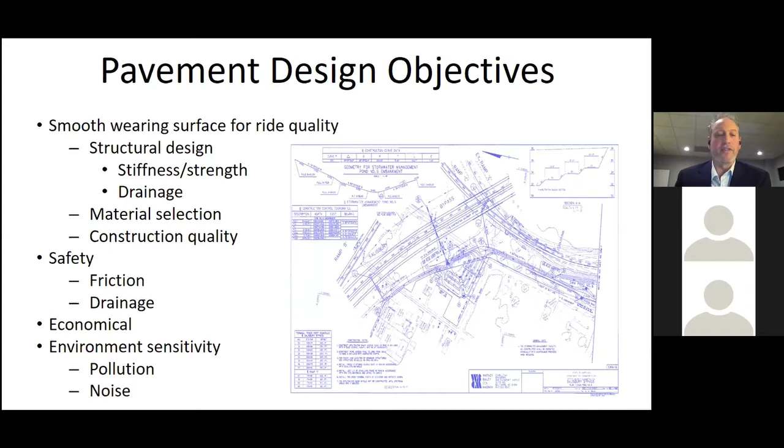So this presentation is going to focus on the structural design. It's not going to consider safety and economics and other factors, but will focus mainly on structures, because we're using geosynthetics to make these roadways stronger, and that's the aspect I want to talk about today.

When it comes to structural design, the basic idea is you have a load applied to the surface, and that load is greatest at that surface - the pressure is greatest. As the pressure distribution goes through the structure, it gets less and less in layers, as you see in this illustration, where on the bottom - which might be your subgrade layer - you want to limit those stresses because those tend to be the weakest. The upper layers, like the asphalt or base course layer, provide the structural support for the loading by limiting the straining and stressing of those lower, weaker layers.

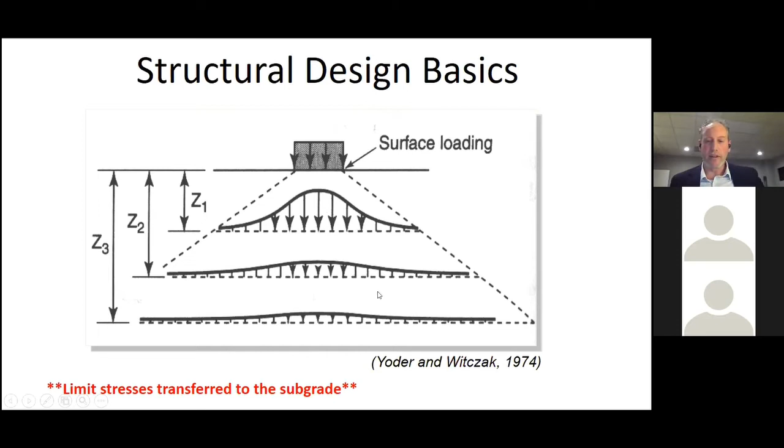In geosynthetics, when you apply a geosynthetic, it's typically put in at the bottom of the base course layer. In this case, you're seeing an unpaved roadway illustration with the geosynthetic at that bottom layer. You can put the geosynthetic higher up, closer to the load, and that does improve performance somewhat. But this illustration is meant to show that there are two main ways geosynthetics might be used in roads.

One case is where you have a really soft subgrade, and another where you have a firm subgrade. With a soft subgrade, you can expect deeper ruts from the load - the material itself is put into higher tension beneath the load, being supported just directly beneath through this high tension and greater rutting, as shown in this illustration. Whereas with a firmer subgrade, typically the roadway is not going to tolerate the rutting - it's maybe a more traveled path that can't tolerate it.

In this case, the geosynthetic is now part of the design, and you'll see the stresses are limited, but they're being borne partly by the geosynthetic at the bottom of the layer.

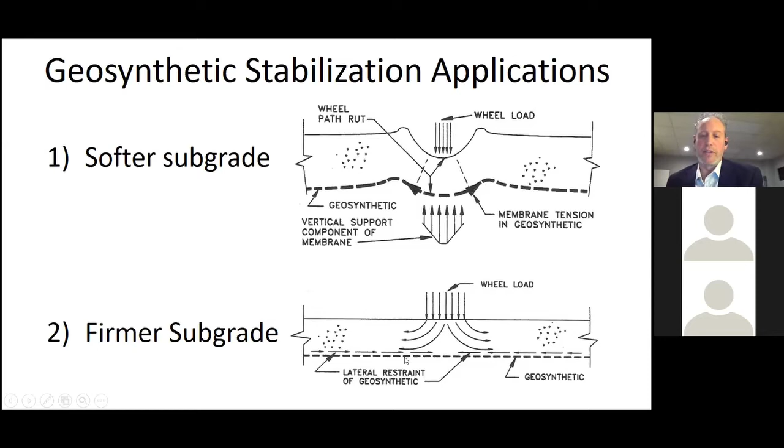Taking the first case, where the subgrade is on very soft ground - this may have low shear strength, or be highly sensitive to water - typically you're looking at CBR, California Bearing Ratios, between 1 and 3. I'm not sure if this property is used in Australia for design, but if it is, CBR is oftentimes used here for characterizing subgrade strength. You can have a high water table, which creates some of this mess you see in this photograph, or a high plasticity index. However you slice it, this is a bad situation you don't want to run into.

In this case, you can use the geosynthetic to create a platform where you're not just pushing all of the gravel layer down into this muddy mess below it.

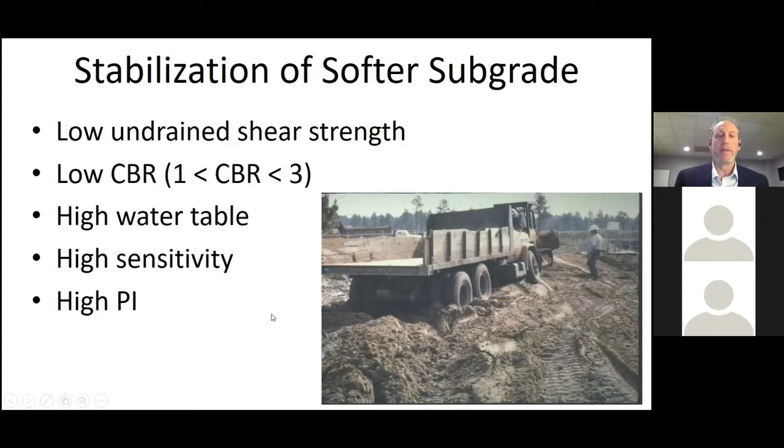Where you have a firmer subgrade, you're incorporating the geosynthetic not only as a means of passing over the structure during construction or throughout the life, but now for a longer period of time, so it becomes part of the design. It needs to be a little more sophisticated, trying to be more efficient. You can do it one of two ways: use the geosynthetic to reduce the section thickness, relying on its strength to provide some structural support, or use it to increase the lifespan of the roadway.

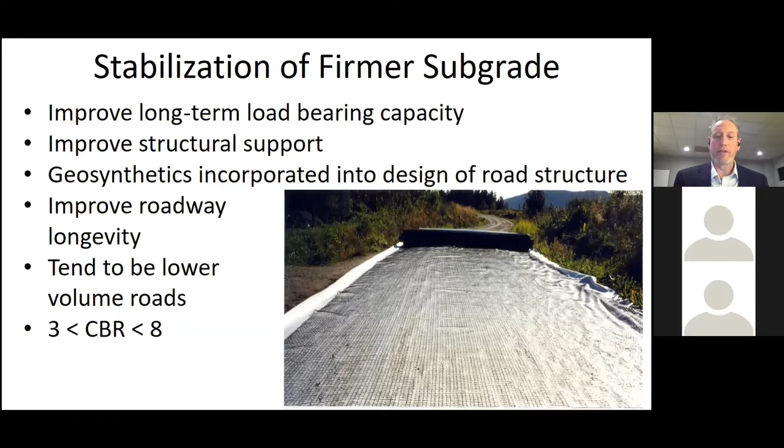This tends to apply on roadways where the subgrade CBR is maybe between 3 and 8. Anything above 8, there's minimal benefit from the geosynthetic, other than maybe using a textile for separating the layers from one another. But in terms of structural support, anything above an 8 is really not that beneficial.

So now let's talk a little more in detail about these mechanisms that we see throughout the pavement. Again, we have a road surface with a tire on top. As the tire puts pressure down, the stresses are transmitted down through the base course layer, and eventually they intersect this geosynthetic layer, which in this illustration is at the bottom of the base course.

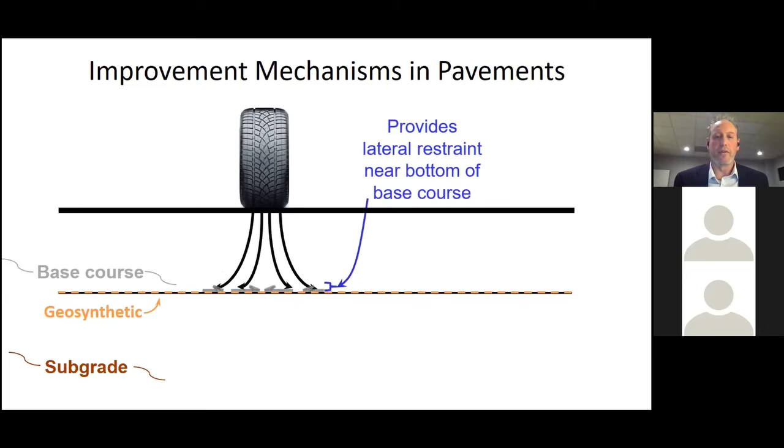As it approaches that layer, you can see the stresses begin to bend and turn to the side. This is partly because the geosynthetic is providing lateral restraint to the gravel at the bottom of that layer, not allowing the gravel to spread out of the way. If the gravel is able to spread, the tire will create a rut in the surface, so you're trying to limit the rutting of the roadway.

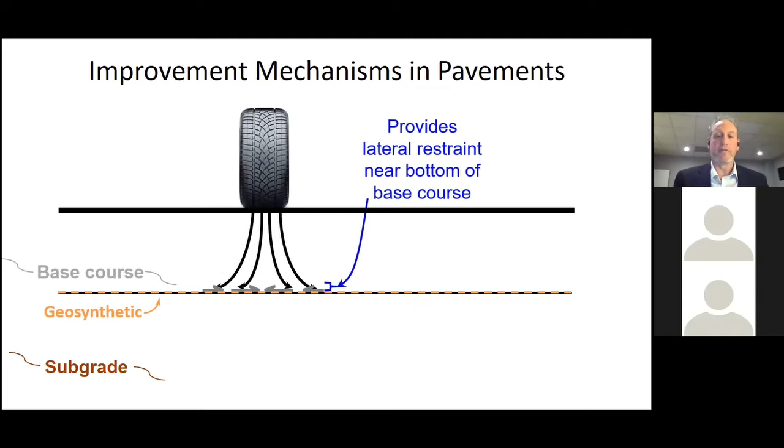This also has the effect of widening the distribution angle. As the distribution angle goes down through the structure, it begins to widen as it comes toward the bottom where this lateral restraint is happening. This increases the horizontal stresses in this area but reduces the vertical stresses, and you see a jump in stiffness due to the geosynthetic. Beneath that, in the subgrade area, you see a reduction in vertical stresses and also in shear. So you won't have as much deformation in the subgrade layer due to the geogrid or geotextile reinforcement being present in the structure.

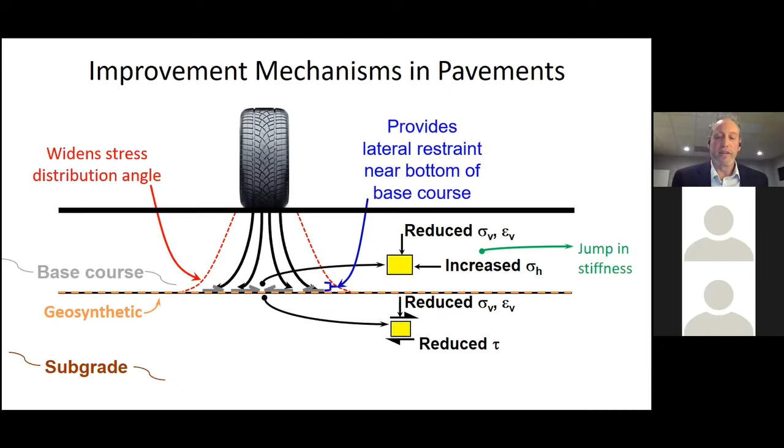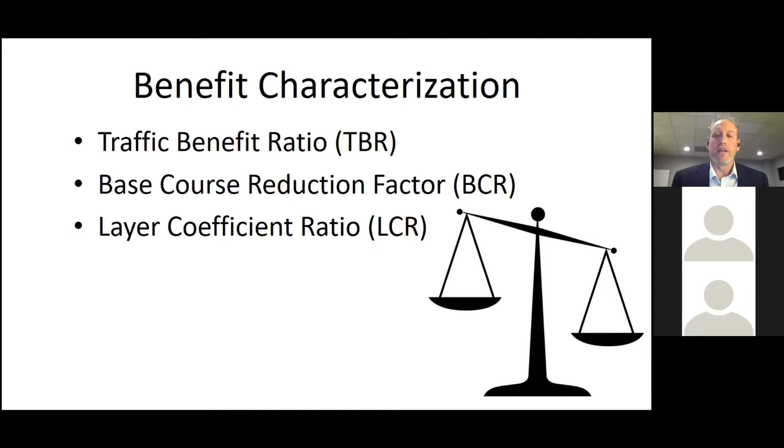Now, there are many ways to measure the benefit of geosynthetics in roadways. There are 3 primary ways they're calculated, and I'll talk about each one. The first is traffic benefit ratio, also known as TBR. The second is base course reduction factor, also known as BCR. And then there's also a layer coefficient ratio called LCR. Each of these is commonly used in design, probably mostly TBR and LCR. BCR and LCR are related to one another, and I'll show that in a couple of slides.

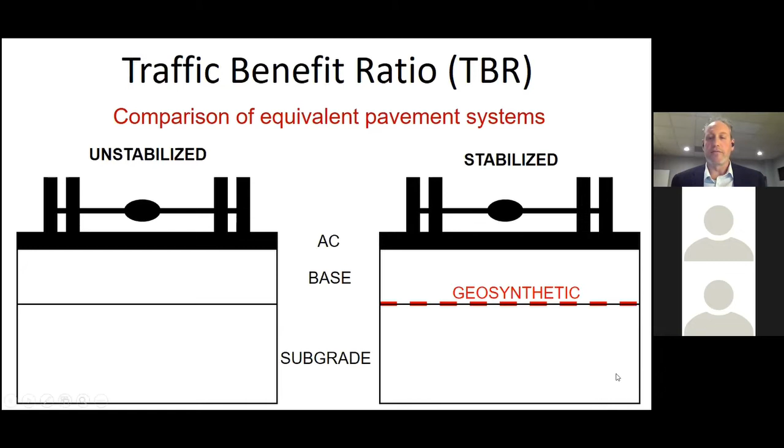In terms of traffic benefit ratio, TBR, you're basically comparing two systems that are identical to one another: the asphalt thickness is the same, the base course thickness is the same, and the subgrade is the same strength. The only difference is that one is stabilized with geosynthetic and the other is not. So you run these simulations, perhaps in the lab or on a full-scale test, and I'll go into methods of doing that. You see that the geosynthetic hopefully performs better than the unstabilized, and you make a comparison between the results.

So here are some basic results you might get, where the unstabilized simulation reaches 25 millimeters of rut in a short amount of time, whereas the stabilized test section reached a much larger number of traffic passes compared to the unstabilized test section. To calculate TBR, it's simply the ratio at a particular rut depth.

Let's say the rut depth you're interested in is 12.5 millimeters. At this rut depth, you take the ratio of the number of traffic passes you got with the stabilized section, dividing that by the unstabilized. In this case, you get a TBR of 4, meaning the roadway with geosynthetic was able to last 4 times as long in terms of traffic benefit.

If you do this same analysis later, say you're able to tolerate more rut, 25 millimeters, in this case the TBR is actually greater. Based on this calculation, you can use this in design to anticipate how many traffic passes you might get from a stabilized versus an unstabilized road structure using geosynthetics.

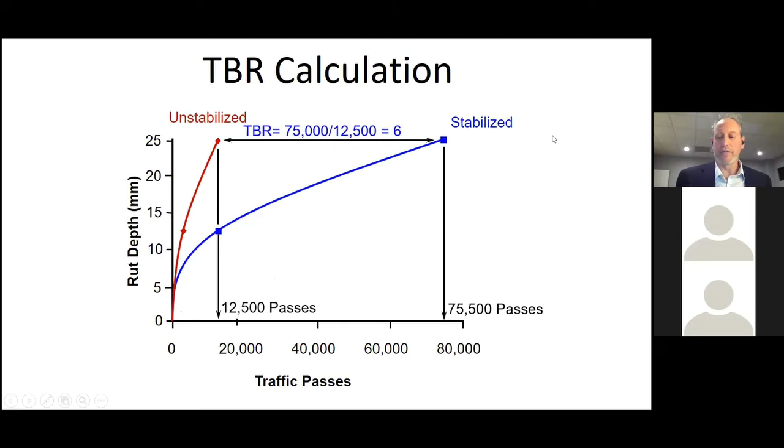Base course reduction factor, or BCR, is a calculation made when comparing pavement systems that lasted the same lifetime. They were able to accommodate the identical amount of traffic passes, but in this case, the geosynthetic reinforced test section was a bit thinner. The base course was just a little thinner than the one that was unreinforced.

This is a little hard to anticipate, and that's why most of the time the calculations are done using TBR, because it's hard to know exactly what this depth of base course is going to be without knowing how much benefit you're going to get from the geosynthetic.

So there is an iterative process that you can use to determine this ratio. But if your design is to save a certain amount of thickness on your road cross section, this might be the way to use it, saying that you're going to reduce your base course by a certain percentage. This is just another way of calculating the performance.

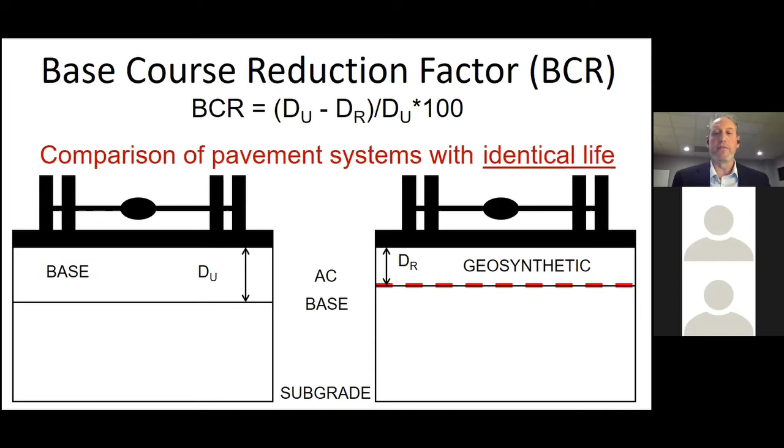And then finally, layer coefficient ratio is to determine the benefit, or try to quantify the benefit of the geosynthetic in terms of a modified thickness of the base course. So again, you're looking at it in terms of the base course thickness. LCR is equal to 1 divided by 1 minus the BCR in percent, divided by 100. So they're related to one another.

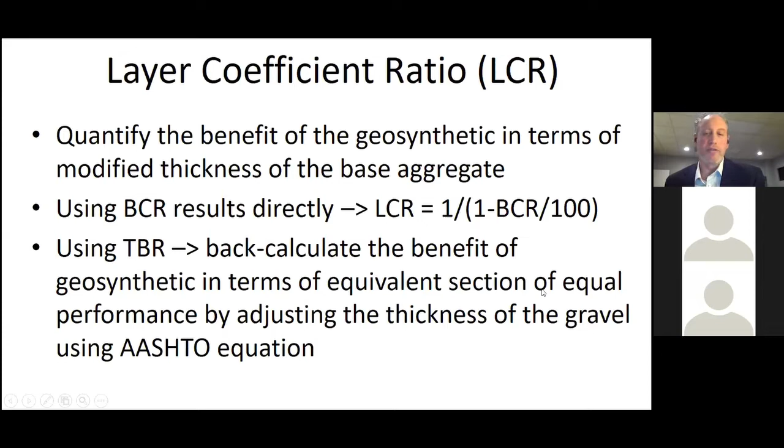The way to get this LCR can be done theoretically by using the AASHTO equation. This is the American Association of State Highway and Transportation Officials equation that is commonly used as a simple way of designing roadways in the United States. I'm not sure what equations are used elsewhere - if you're in a mechanistic design, maybe someone can comment and let me know what that is. But there's a way to calculate that, and I'm going to talk a little bit about that now.

Here's the AASHTO equation. I'm not going to go through all the parameters here, but the one I want you to focus on is the structural number, which describes how strong the support is from the structural benefit of the layers. The way that's done is by having this equation, the structural number, where you have a coefficient that describes the structural strength of the particular layer.

In this case, A1 and D1 are for the asphalt, and D is the thickness, so you'd multiply those two together. Then base course has the A, again a structural coefficient associated with the base course, multiplied times the thickness, and then also multiplied times the drainage coefficient. So this is how we calculate the structural number.

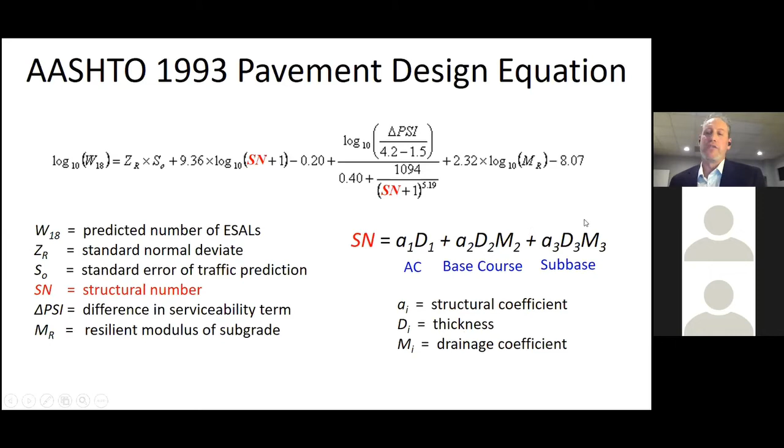Essentially what you're doing when you determine LCR is the LCR is a multiplier times the base course term in the structural number equation.

So let's just say, based on your performance testing, the test section worked much better - let's just say it worked 20% better. You basically apply that 20% benefit to the base course term in this equation. So it would be a benefit of 1.2 multiplied times that term, which makes the base course seem like it's a little thicker, or makes this A2 term seem like it's a little stronger. However you want to think about the LCR, it's basically to modify the second term in the structural number equation. So LCR obviously should be greater than 1 to be able to apply that increase in the structural number to the design equation.

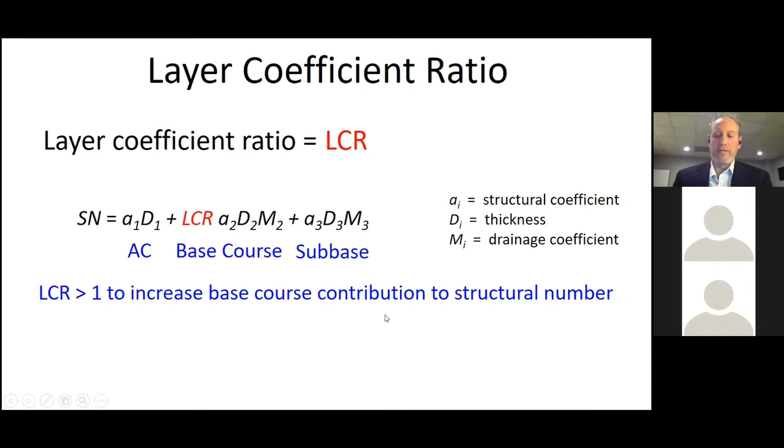So that's the basics about the way that performance is calculated. But here's how I wanted to talk a little bit about how you get that performance information in the first place through different testing. This is something that we do here at TRI, and it's something that I've done for quite some time now. So I wanted to share with you some ideas about performance testing, because many times performance testing can be done poorly, and there are good ways to do it.

Probably the biggest key to doing performance testing, either in the field or in a lab, is to make sure there is consistency between the test sections. You're trying to compare the do-nothing case to the one where the geosynthetic is in the test. If everything is the same except for just the geosynthetic, then you have a good way to compare those one to another. Without that, it's very difficult, and all the competing factors associated with roadways begin to outweigh some of the other elements that make it easy to calculate performance. So that is probably the key element to making performance testing work well.

Of course, you've got to select good materials, and you've got to place those materials. If you're doing it in a lab situation, you want to make sure it's as realistic as possible, hitting all the proper tolerances and doing the QA, QC to ensure that the test sections are built similarly to one another.

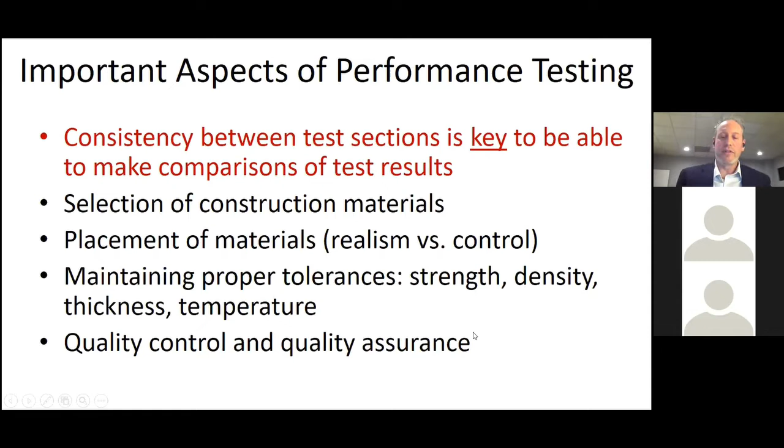There are different methods of doing performance testing, all the way from full-scale tests out on an actual roadway, to doing something maybe larger scale but in a laboratory with accelerated pavement testing, or some sort of smaller simulation in a lab using a smaller box or something that applies a load.

To know which test method you might want to use, you're basically going to balance realism with cost and time and effort. The more realistic it is, probably the greater effort it is, and it's going to cost you more. So there are some trade-offs, but the smaller simulations can tell you a lot, and they're maybe more rapid and just as well. So it depends on your budget and what you're after.

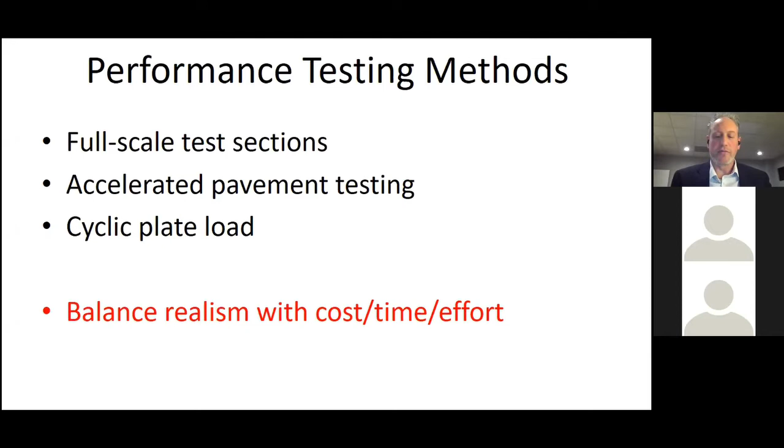A full-scale test section could be on an actual road, like I said before, or it can be a controlled experiment. It's the most realistic because it's done with full-scale equipment. It's oftentimes has the longest timeline because you're relying on actual construction and all that goes into that.

But you tend to lose a little control, especially if it's on an actual roadway, because the contractor wants to do this as quickly as possible, and you might be a thorn in their side as you try to do this experiment in the midst of their trying to make money.

These tend to be higher cost, but again, if you do this just on an actual roadway, and you don't really care about all the details of making sure the test sections are similar to one another, then you can strip some cost off. But then when you go to make your comparisons, you're going to suffer there. So there's always this balancing act that you have to do to try to figure out the right way to do it.

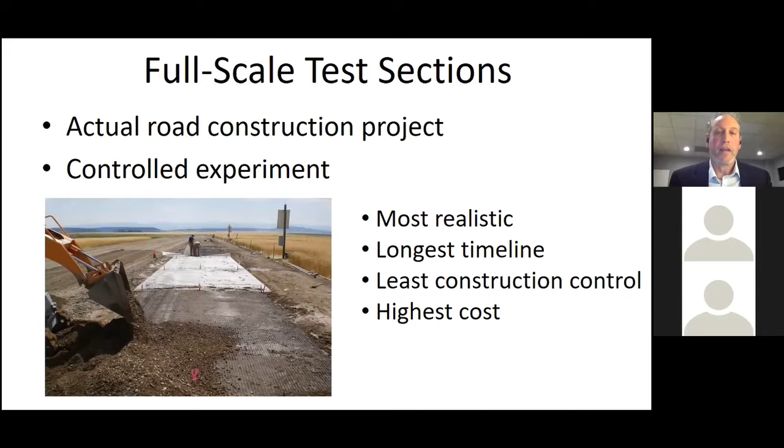I'm going to give you an example of a full-scale research project that I led when I was part of Montana State University back in the mid 2000s. 2014 is when we completed the project.

In this research project we had 17 test sections. I'll show you what that looked like here in a minute. We wanted to look at the geosynthetic material properties themselves to see which one actually was related directly to performance in the field in this particular application.

This was a subgrade stabilization application, so it was a very soft subgrade, a CBR of approximately 1.7. And we wanted to understand those mechanisms by which the performance was enhanced.

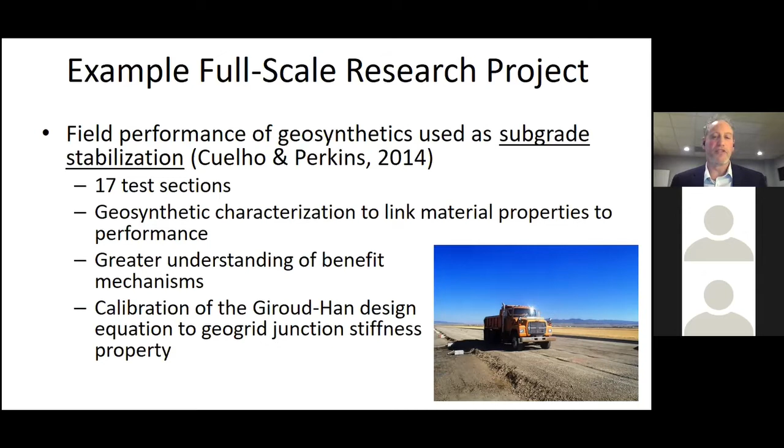Then we calibrated the Giroud-Han design equation for a particular material property, which is the junction stiffness. I'll show you how that was done as well. In this experiment, we had 17 test sections, as I mentioned.

There were 3 test sections at the beginning where we had an integrally formed grid. It was the same grid in 3 of those test sections. Each test section was 15 meters long and about 5 meters wide. In these test sections, we had the same base thickness of approximately 27 or 28 centimeters all the way through.

But these first 3 test sections actually had a stronger subgrade on one end and a very weak subgrade here. Then from section 3 all the way to the very end had a subgrade strength of about 1.8%. So what we're trying to do here is vary the subgrade strength to see what effect that has on the performance.

On the other side, where we had the controls with no geosynthetic, we actually increased the thickness of the base for control 2 and then even thicker for control 3, with thicknesses of 41.4 and 63.2 centimeters. The nominal thickness was, again, approximately 28 centimeters.

In this way, we set the experiment up so that we could back calculate what the effect of gravel thickness was, as well as the subgrade strength. And in the midst, of course, we have all these different materials that we were able to test to see which material worked well and why it worked well.

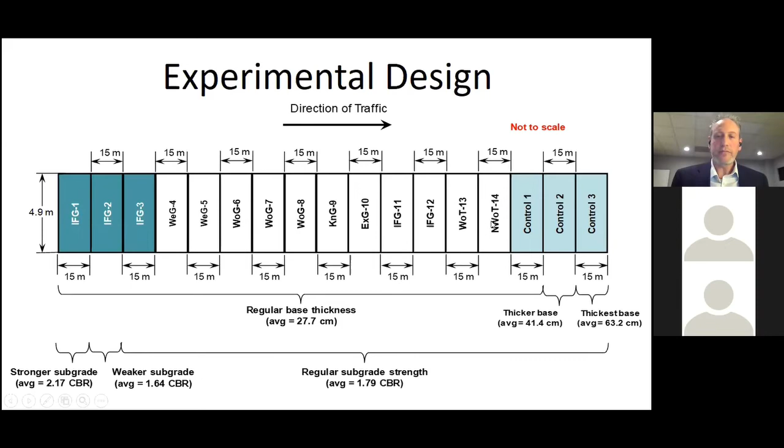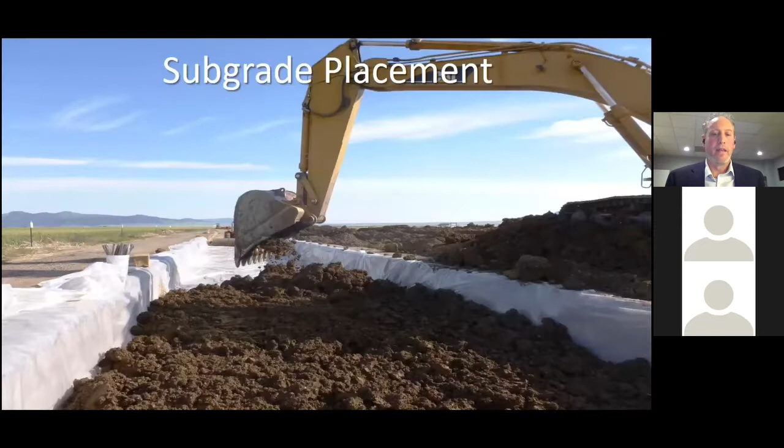This is mixing the subgrade and putting it in the trench. We had to mix it at the right proper moisture content to make sure that it was exactly the right strength the entire way. It's very wet—like I said, a subgrade CBR of approximately 1.8%.

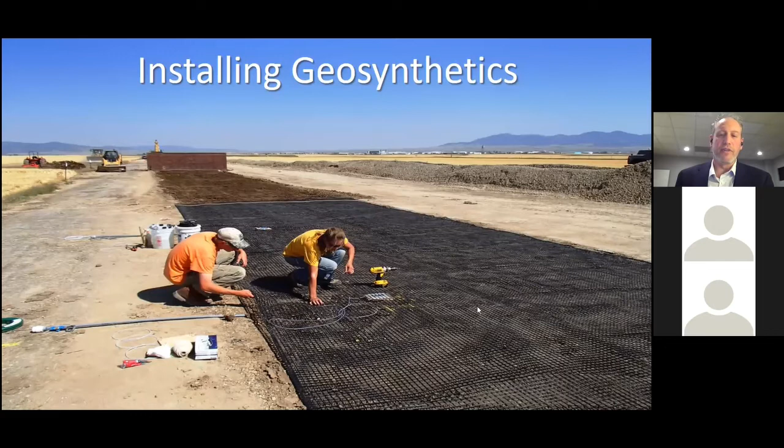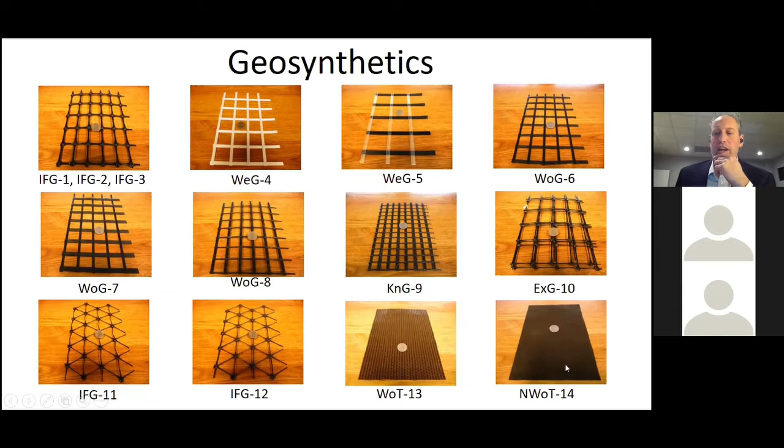Here is a picture that shows each one of the geosynthetics that we used, starting with an integrally formed grid. These are very common materials. Then there's a welded grid, and another welded grid. You can see the different types here, and you may be more familiar with the brand names. We also used 3 different woven grids, shown here. And then one knitted grid, a different style of grid. Another had a triple layer extruded grid. And then 2 other integrally formed grids with triangular shaped apertures. Finally, we used a woven textile and a non-woven textile for each of the test sections. So these are the different materials that we used.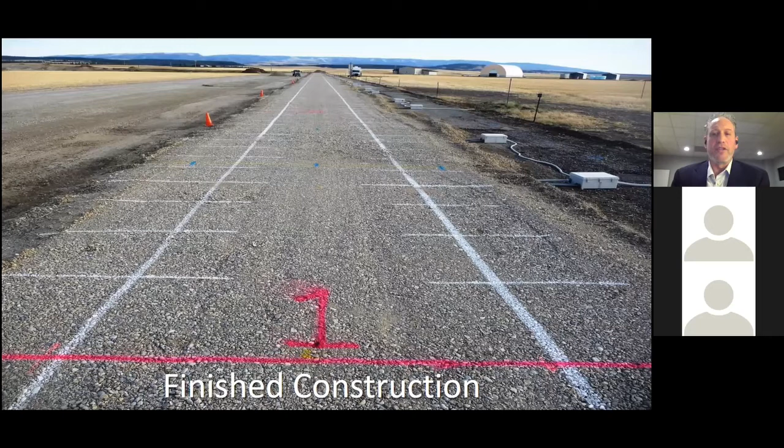Finally, we went to put the materials in. We covered it with base course and drew some lines on there so that the truck driver could stay in the right spot with all the instrumentation. Then we drove a truck over it — a fully loaded 3-axle dump truck, driven across at approximately 10 kilometers per hour.

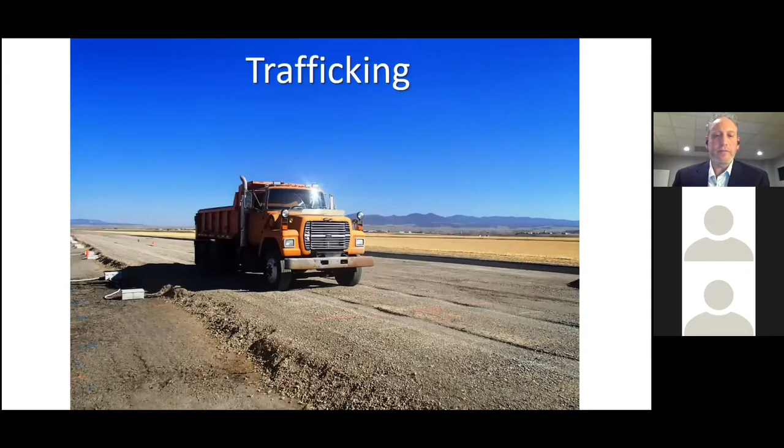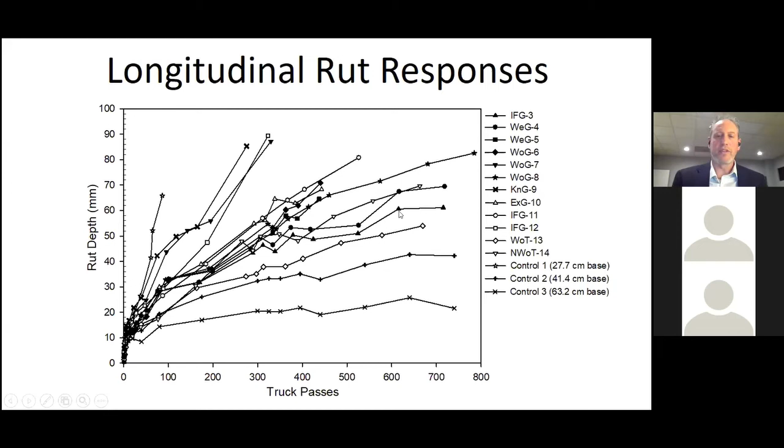So we took that information and calculated the TBR — traffic benefit ratio — at a particular depth of rut, in this case 63.5 millimeters. We did the analysis and also calculated the amount of base course reduction. What I want to show first is that all these values of TBR are positive, meaning every single material was able to improve the performance of the test section compared to the control. Even the worst performer, the knitted grid, had a base course reduction factor of almost 10%.

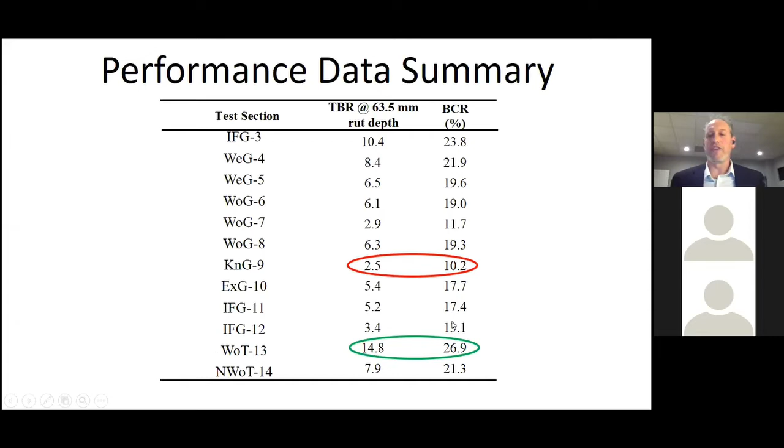So you can reduce the thickness of the base by 10% in this case. The best performer was the woven geotextile, with a traffic benefit ratio of almost 15 — meaning it could accommodate 15 times more truck traffic than the control. The base course reduction was around 27%. So you can see the range of the different products and how they performed in the field.

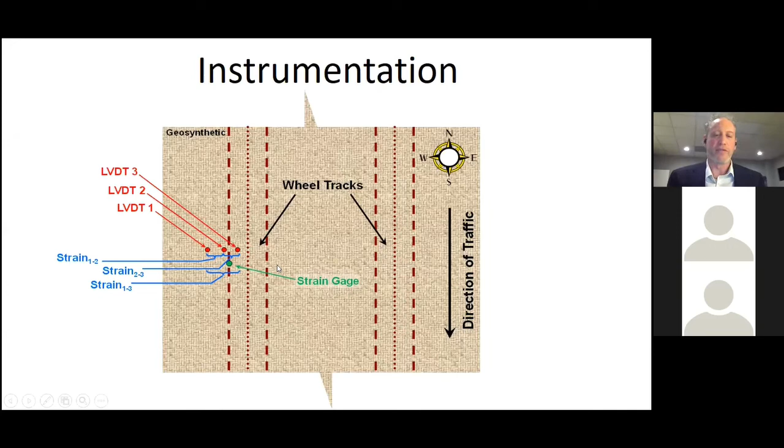We also put in some instrumentation because we wanted to measure what was going on — this is the behavior side of it. We had strain gauges and LVDTs set in the ground to look at movements. This is an illustration. The basic thing I want you to get, without getting too stuck in the weeds, is that there's a transition from lateral confinement, where the geosynthetic provides resistance to the movement of the gravel in the lateral or horizontal direction.

But eventually, once the rut gets too deep, you transition into a tension membrane, where the material is under a lot of stress and tension. There are different material properties associated with those two ends — in the first part you rely on something different than when you're relying on pure tension at higher deformations.

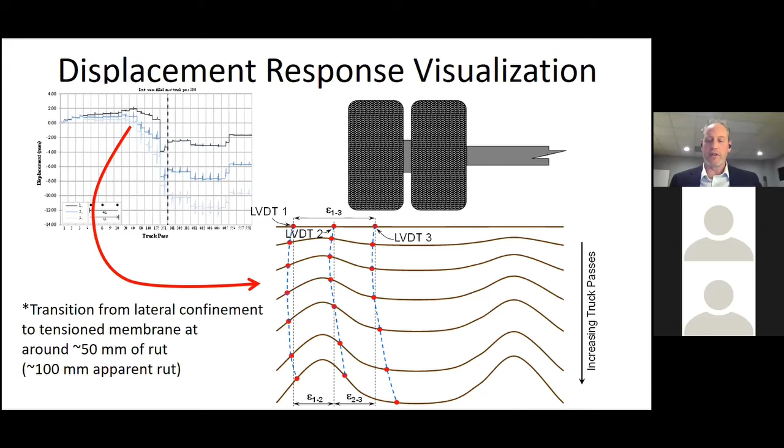I just want to show an illustration of how this might look as the truck goes through the test sections. You see these two little red arrows down here — as the truck continues to go past, the red arrows and the stresses in the material begin to accumulate. Once the rut forms, there's always going to be that stress on the geosynthetic.

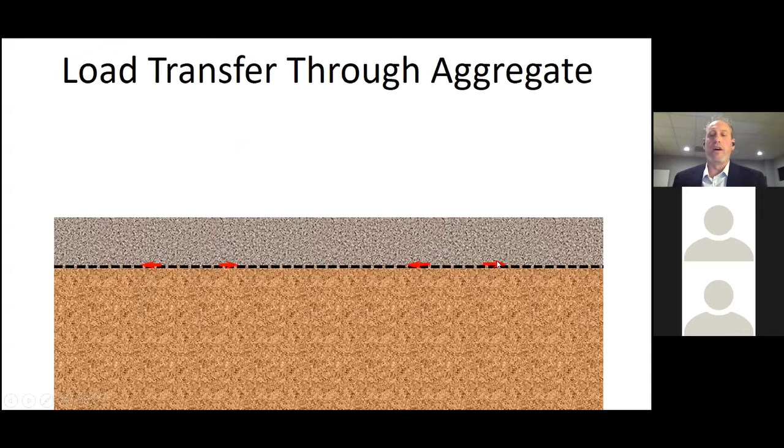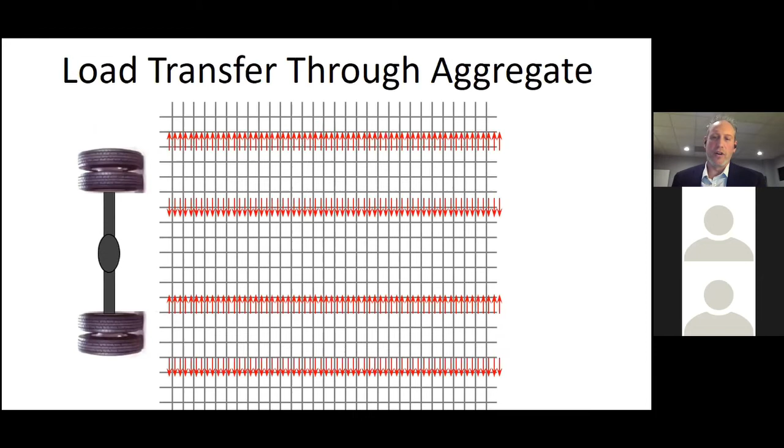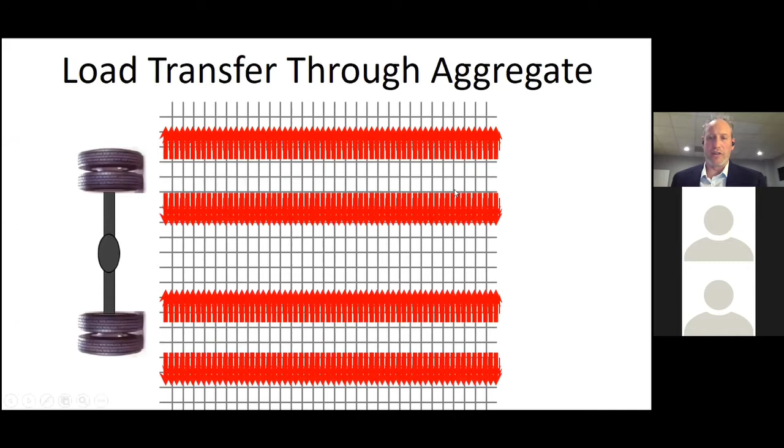So you can see that the stresses get highest after many truck passes. I'll show this in the plan view as well, because I think it helps illustrate this. As you go across, you're pushing outward from the different tires on either side, forcing the gravel in that direction, so the stresses are increasing in time as traffic increases across the test section, until eventually you have high stresses outside each of the wheel paths in this direction.

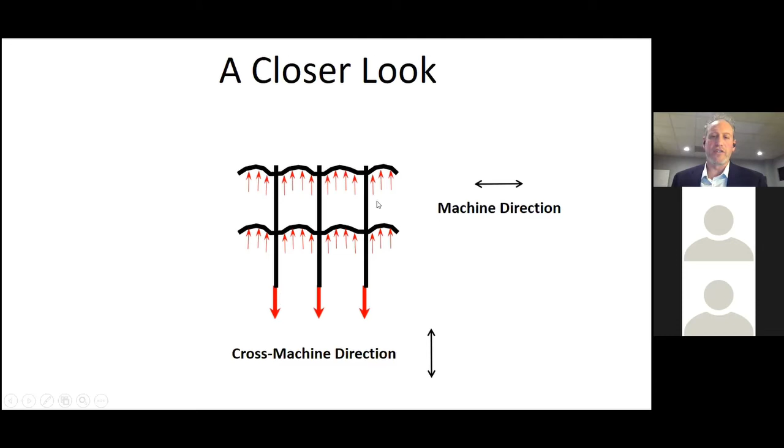If we take a piece of geogrid, in this case a biaxial geogrid, we can see that those stresses are being borne by the cross members in that direction, and then the tension is being borne by the straps transverse to the driving direction. So the truck is going across side to side on this slide, and the stresses are being applied in the opposite direction.

There's actually a test at ASTM that looks at that particular property. But we had lots of different properties of the material we looked at. Here we looked at wide width tensile strengths, cyclic tensile strengths, a pull-out test where you look at the resilient interaction between the geosynthetic and the gravel, and also a test called junction strength. We also looked at aperture stability modulus, which is in the Giroud-Han equation.

What I'm showing here on this slide is the R squared, which is how well a linear regression fit between the materials used—these properties were different between the different materials—and how well that fit the performance data.

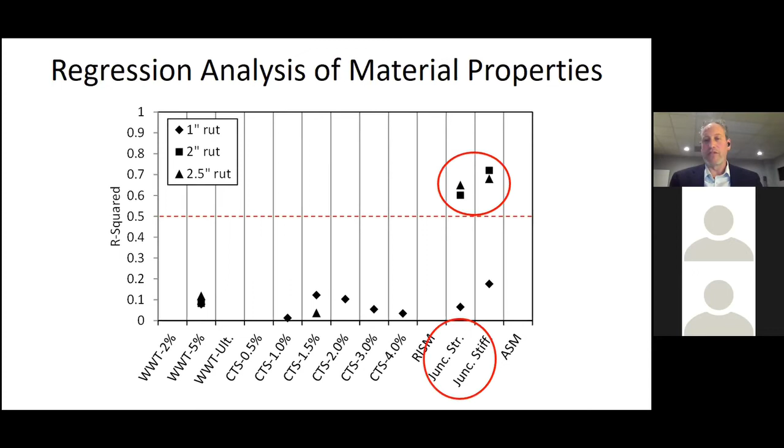What we see here is that the R squared is highest on the junction strength or junction stiffness—how well those junctions and that material are set with one another, how strong that is. And that makes some sense based on what I showed you earlier and how the stresses are borne in the material. So this is that test.

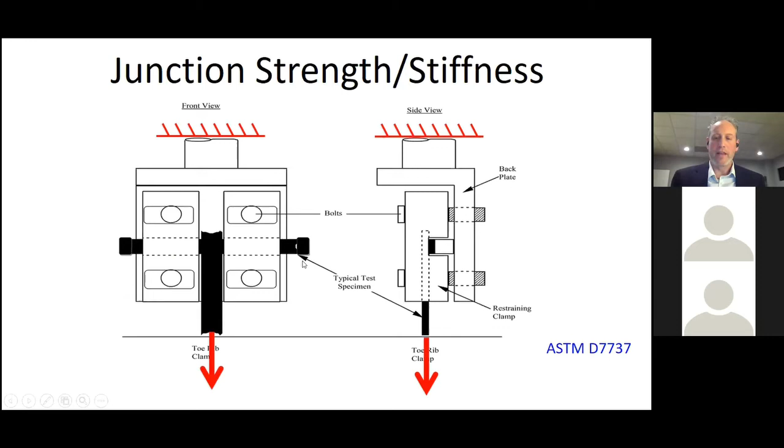It's an ASTM test. Basically you pull down on this cruciform-shaped material, and that junction is stressed by trying to shear one versus the other. We found that property really matched well with performance. In this case, the stiffness is just the initial part of the curve—that's how we calculated the stiffness of that junction.

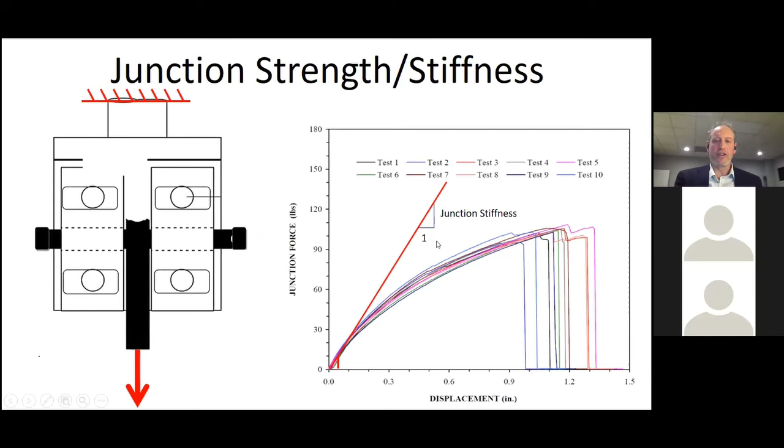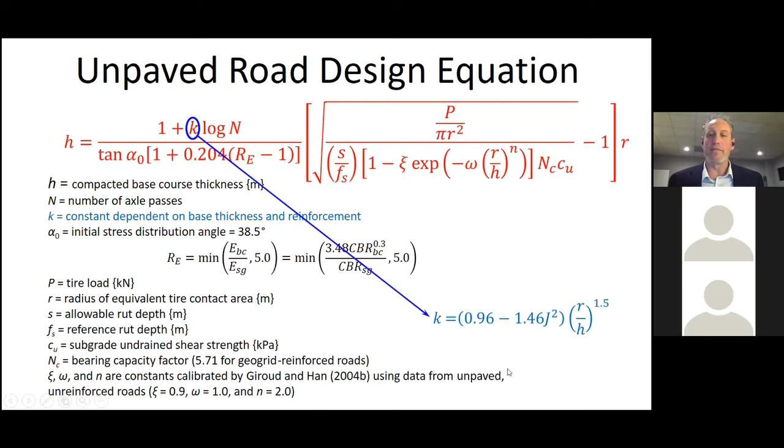We wanted to say, okay, now the Giroud-Han equation, which is this hairy, big equation—if you haven't seen it, I don't mean to intimidate you, I'm not going to go through it in detail. But what I wanted to point out is that this K factor really describes the geosynthetic component in this design. The J here is the aperture stability modulus, a test that twists the junctions of the geogrid. We didn't find that was related to performance.

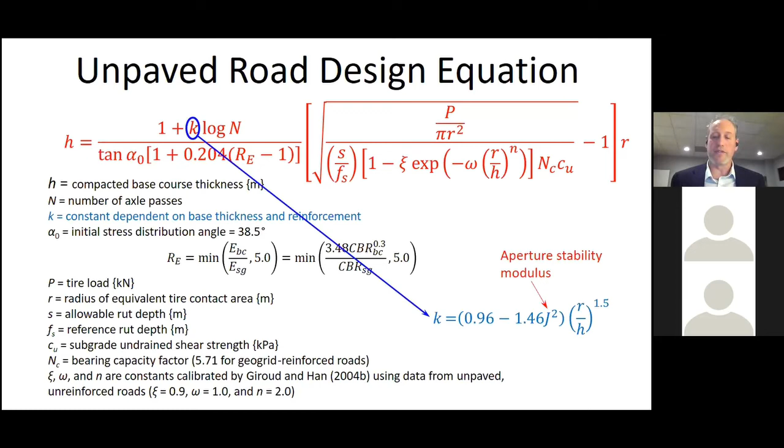In our case, we found this junction stiffness was related to performance. So we basically modeled that, and through a series of mathematical work, we essentially modified this K term in the Giroud-Han equation to accept this property rather than using the original aperture stability modulus. This just shows an illustration of how you might do that.

You calculate this junction stiffness, you come up here to the amount of rut that you might be allowed, and you get this K-prime factor from this chart, and then you can use that in the equation to solve for the thickness of the gravel.

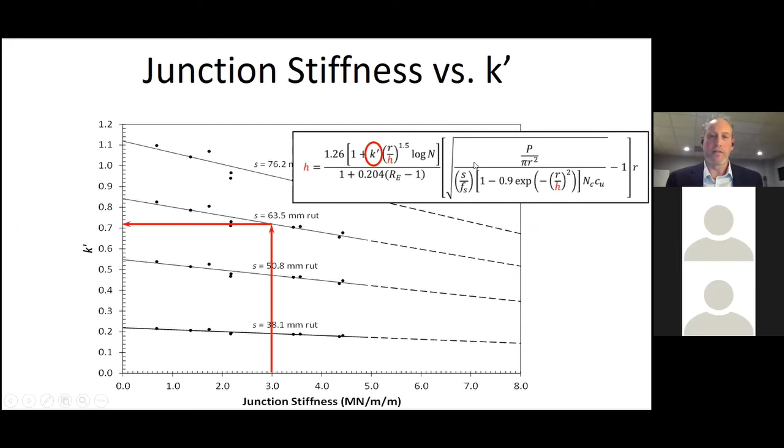So you might be wondering, well, the textile was the one that worked the best in our test section—what happened there? It doesn't have these little junctions, but I think in textiles, how they're woven, all those little junctions are in touch with one another after being confined by the gravel, and they allow that stress to be transferred. Because it's a full membrane of material, it allows those stresses to be transferred across basically an infinite number of intersections.

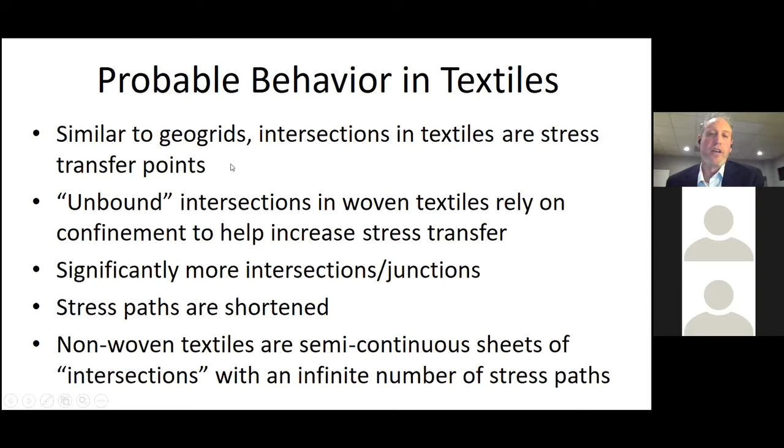So I think the idea is that it's just a lot of stress paths, and those stress paths are shortened when it comes to a textile because it's continuous, whereas the grid has a lot of open space where the rock can get in touch with these members, and the members are able to bend and that kind of thing. So there's some thoughts about that, but we didn't have enough textiles in our test sections to really show exactly what happened—that was just based on our intuition.

And so for this subgrade stabilization application, we allow for very large ruts. There's an early reliance on the geosynthetic to resist that lateral movement, as I was saying before, and I think that is related to this junction stiffness property. But later on, as those ruts develop, there's a greater reliance on the tensile strength in the material itself, and we saw that through our mathematics.

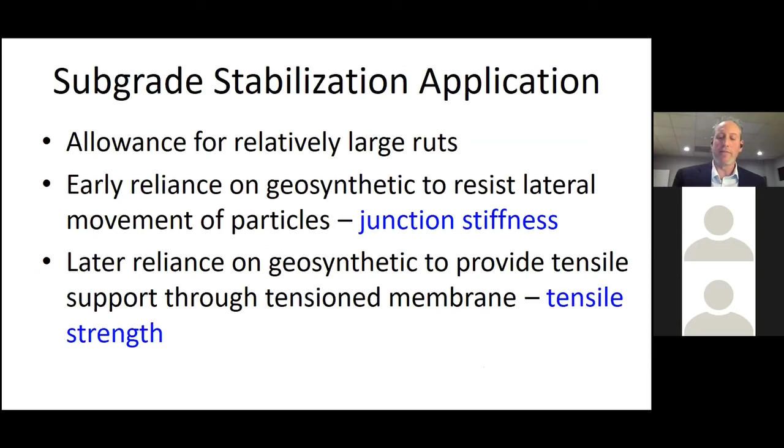So that just shows you what was done in a large scale test. Now we're going to move on to something that's more laboratory derived.

Here it just shows a video of our test device in one of our labs where we built a paved simulation. In this case, it has approximately 75 millimeters of asphalt on top of 300 millimeters of base on top of a subgrade CBR of approximately 2.

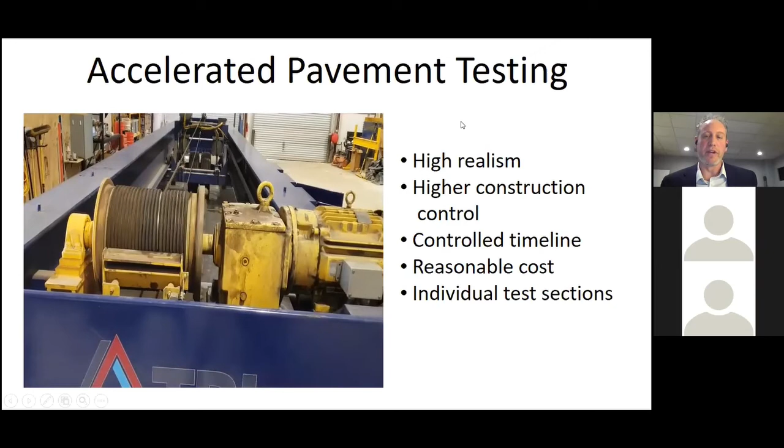So these are very realistic test sections. You can build them with full scale equipment. You have a lot of tighter construction control because it's smaller, and you can control that timeline, and the costs become more reasonable when compared to the tests I just told you about. And this can be broken up into individual test sections to look at various different parts of your design.

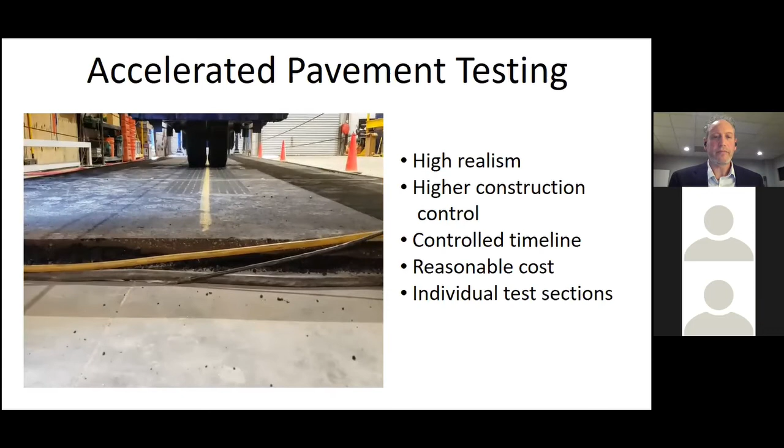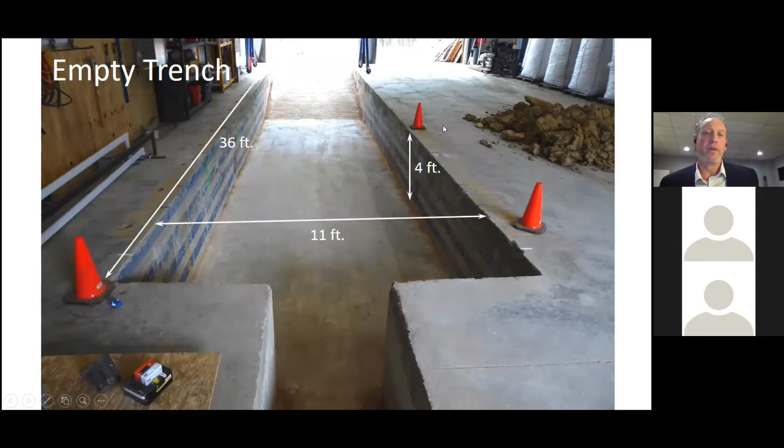This is the test pit. I put this in feet, so you'll have to convert, but it's about 3 or 4 meters by approximately 11 meters long and about 1.2 meters deep. And this just shows a concrete lined pit where we can build these test sections.

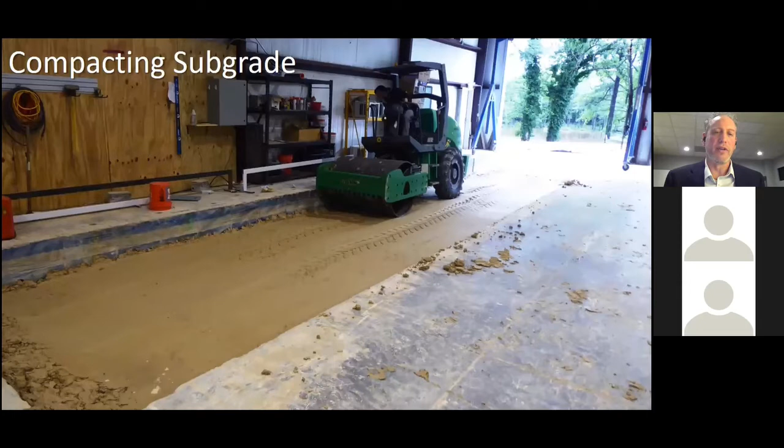This is us installing the subgrade. We mix the subgrade up to a certain moisture content, compact it in place with machines and a roller here, showing us later on in our construction. And then we level the subgrade surface off to make it smooth and all the same depth. This just shows the finished subgrade surface in this case.

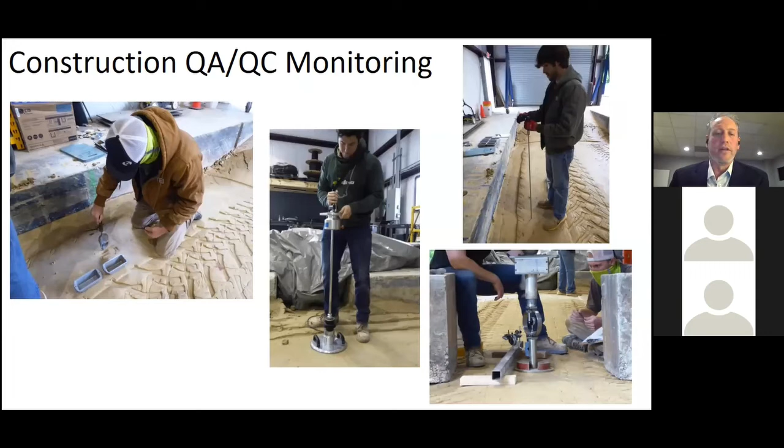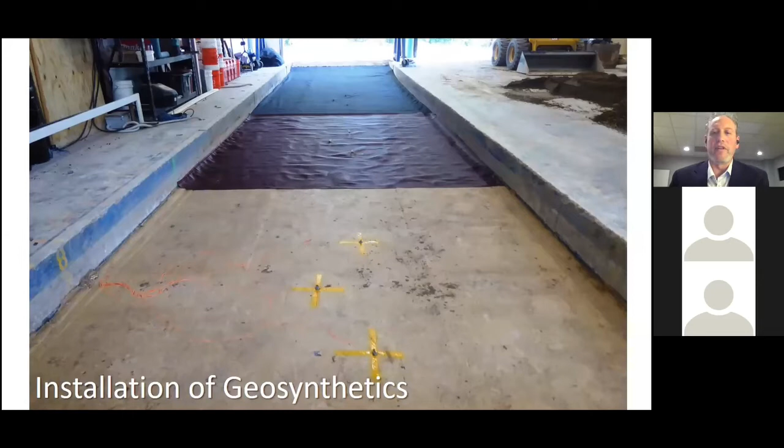And we do lots of tests on it to make sure that we are getting the same properties, making sure each test section is built identical to one another. This just shows what it looks like with, in this case, a couple of geotextiles that were used to reinforce the test section. In the foreground, you see the control that did not have a geosynthetic in it.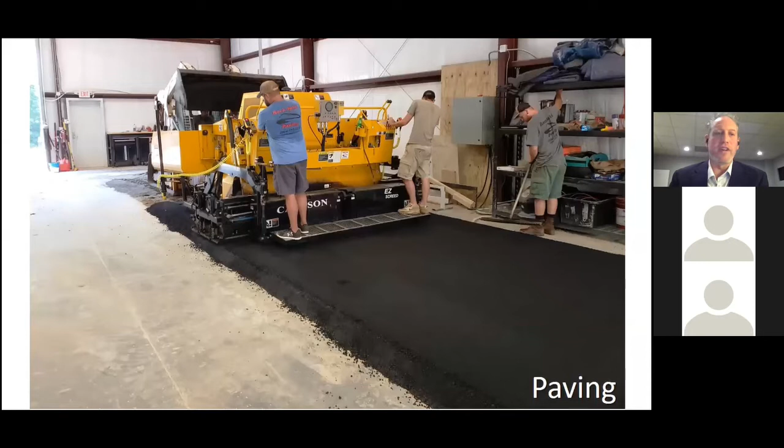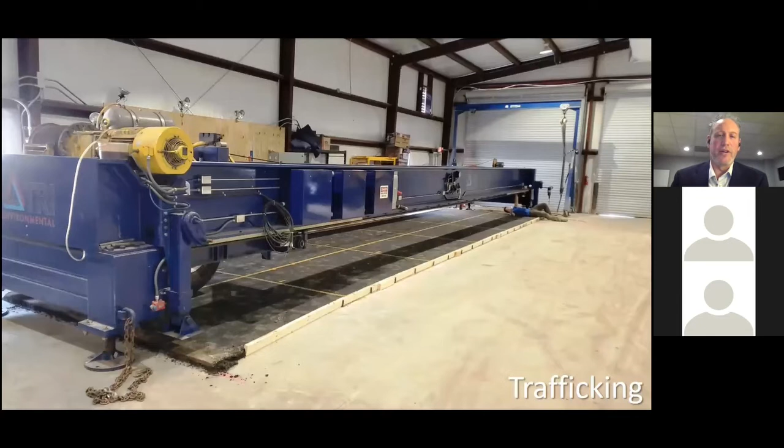This shows the base course being installed. And then finally, we paved. You see it's all done inside of a building. The building is climate controlled so that when we're testing, everything's kept the same. And then this is, again, just showing our test device here that is able to roll over and provide the traffic.

And you get results that, like I was showing before, there's something like this. These are actual results of a test that we did for a client. You see the control over here did not perform nearly as well as the reinforced test section in this case. You can calculate TBR, you can calculate LCR using this information.

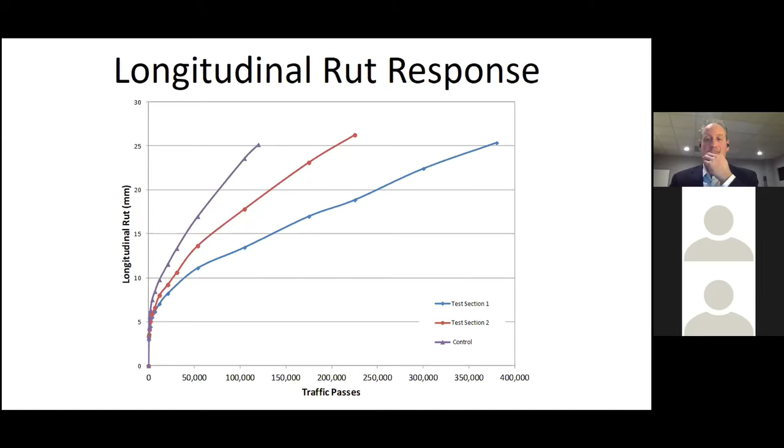Another test, now this is smaller yet, this is a box, approximately 2 meters wide by 2 meters long and approximately 2 meters tall. It's probably the least realistic, partly because it's a plate load test. Here you're just applying a load to a plate that's stationary rather than having that rolling wheel load, which is a little bit different. But you get high control because it's such a smaller amount of volume, so you don't have to build as big of a simulation. It tends to cost a lot less, and you can do individual test sections.

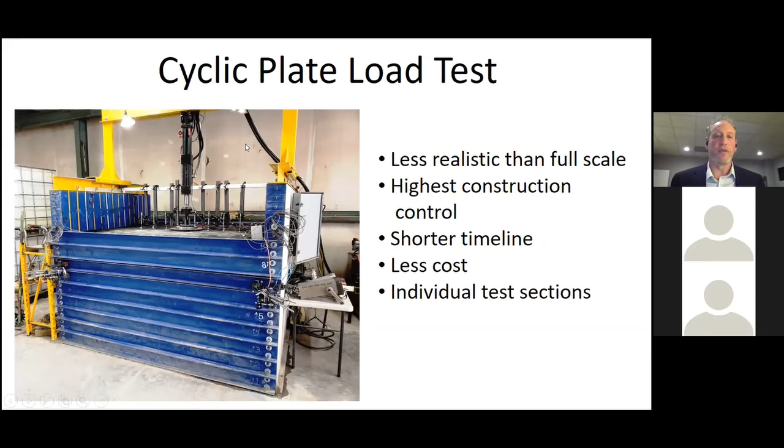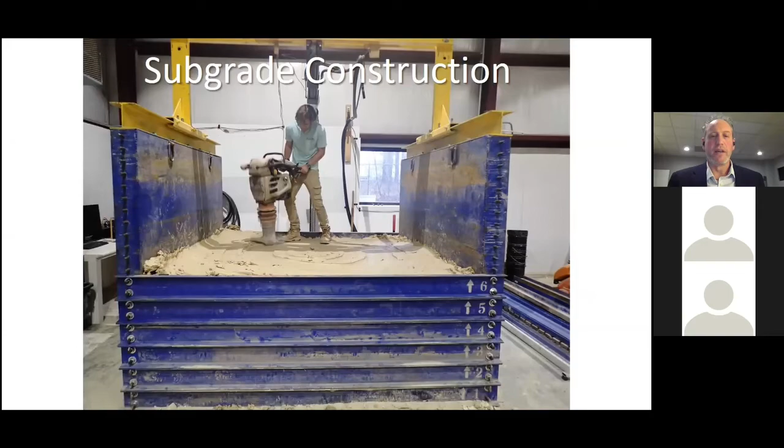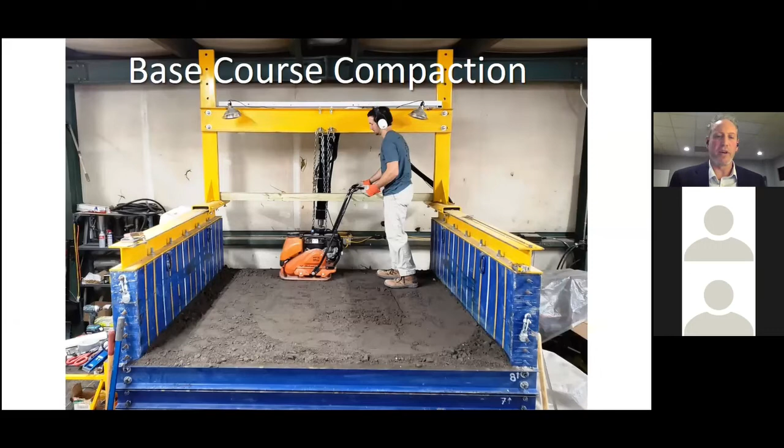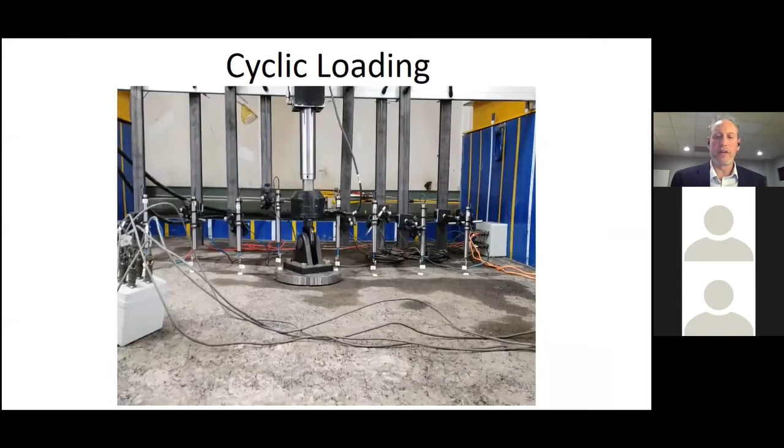Installing the base course with aggregate. And you can see here now we have to use a smaller piece of equipment, so we thin the layers down some to be able to make sure we get compaction. And then this is compacting the asphalt. And this is what it looks like when it's under the load. The load is the same, it's simulating a fully loaded truck. It says 40 kilonewtons, and the plate size is a 300 millimeter plate.

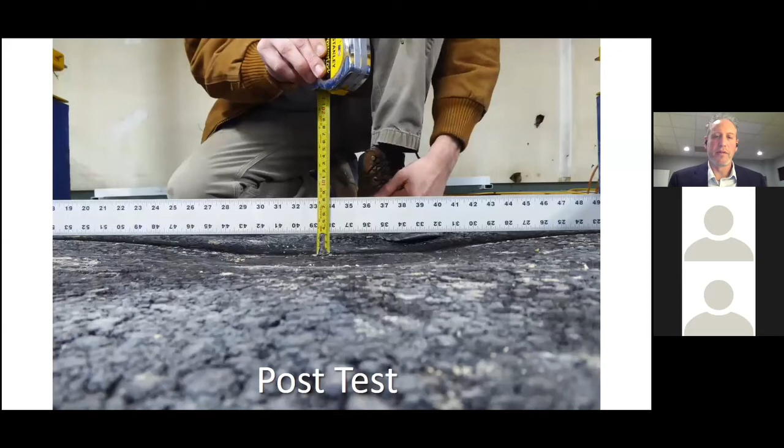So to quantify performance, we looked at full-scale tests outside, maybe on a real roadway, or in a controlled area with a rolling wheel load test and a cyclic plate load test, which is a smaller box test that we showed you earlier. When you use those tests, you can calculate the TBR, BCR, or LCR for whatever property you're interested in, so you can use that in your design.

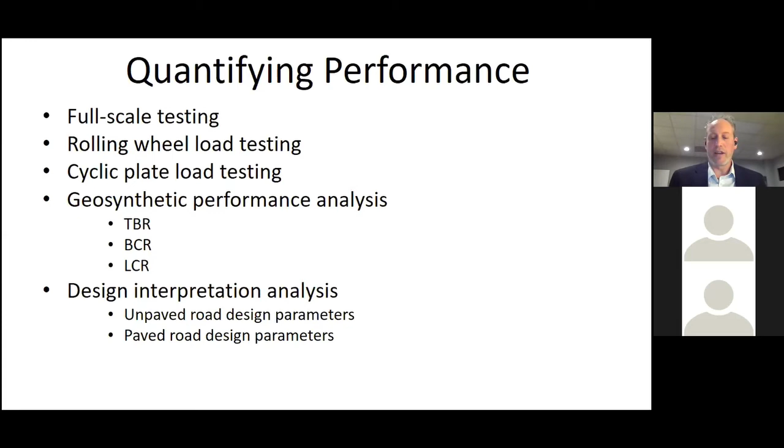You can interpret that information to be able to use it right in an unpaved or a paved road design, like I illustrated. And TRI does all of these things.

Now that I've ended my presentation, I just had a couple of slides I wanted to introduce as we close out. TRI is also wanting to do a short course in Australia. It's possibly going to be a webinar, but it's to go deeper on this same subject and look at the fundamentals of road design using geosynthetics.

In this design course, we would talk about the different materials used in structural design for roadways, common types, how they function, the mechanisms in the road, going deeper into this analysis and deeper into the design of this particular topic, how pavements work, unpaved and paved road design, talking about the AASHTO 93 method. All these different topics are going to be covered in this one day short course.

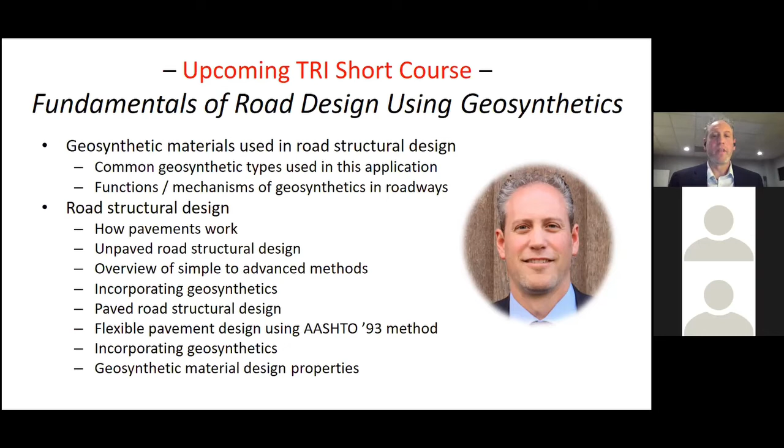Here are the primary learning objectives: to understand the general structural behavior of unpaved and paved roads, to identify various geosynthetics and their associated functions within this application, to design geosynthetic reinforced unpaved and paved roads, to become familiar with material properties and performance testing of geosynthetics, to have an appreciation for related geosynthetic specifications and construction considerations, and to evaluate understanding through quizzes and practical design examples. Those are the objectives of this course that we want to put on.

I think Warren and I have talked about when to do that, and we are shooting for later this year, maybe in the October or November timeframe. So I'd like to maybe, if it's possible, poll the audience to see whether they might be interested in something like this.

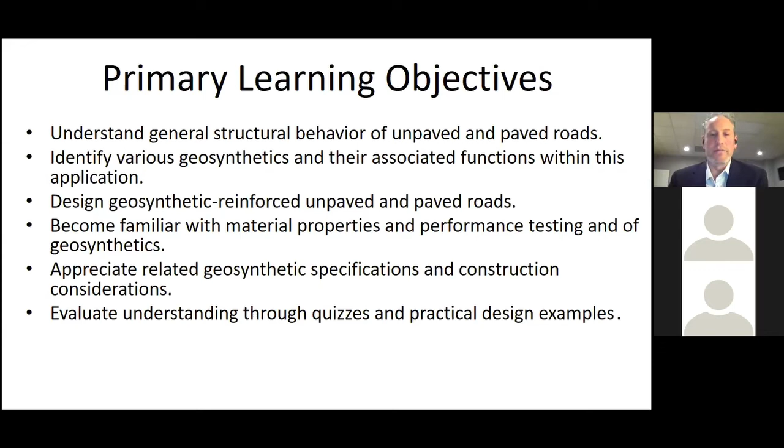With that, I conclude my presentation. I think we have some time for some comments or questions on what was presented.

Thank you very much. Yeah, very interesting presentation. It's nice to see all these different methodologies that are used to test the materials and how you do those. So I've got a question regarding the compaction. What test do you undertake on the subgrade and base course to ensure that proper compaction has been applied?

Yeah, so on the subgrade, we're not looking for a density, we're looking for a strength, and typically that strength we're shooting for is a CBR. So we'll have a target for that CBR strength, and we've done laboratory tests to relate CBR to an infield shear strength using a handheld vane shear.

For the subgrade, it's soft, so we use this handheld vane shear -- you push it into the ground, it's got a little vane on the bottom, and you twist it and get an immediate measure of shear strength. The reason we use that is because it's pretty accurate, and it allows us to make sure that the test sections are done equally to one another. We already have a relationship between the vane shear and CBR from a lot of different testing we've done. So for the subgrade, that's how we generally do it.

And then for the base course, we will take a density measurement using a sand cone. We also use a DCP, a dynamic cone penetrometer, to look at the strength that way. And then we also use an LWD, a lightweight deflectometer, that puts a dynamic pulse down on the plate and gives you a direct measurement of the dynamic stiffness of the material.